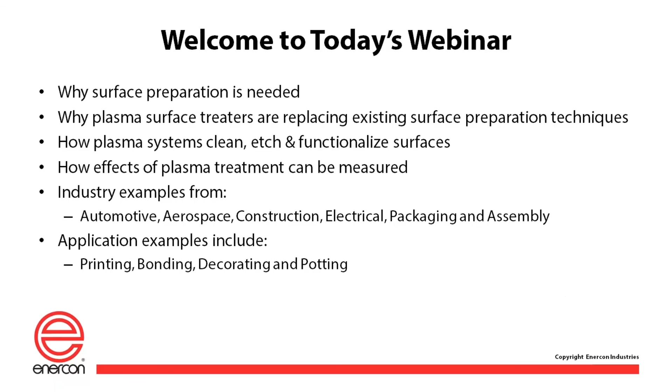Good morning. Thank you all for attending. I appreciate you taking the time out of your day to be here. I'm excited to actually talk to all of you about surface preparation in general. That's kind of where we're going to start. Talk about plasma, of course, being our main topic, but also some of the other alternative technologies available. Hopefully striking a chord with some of you that do work in surface preparation or want to just learn more about the different technologies available.

So I'm going to start by talking a little bit about cohesion and adhesion. When we're talking about trying to get something to adhere better to the surface, you've got two different pieces to look at. When you're looking at the forces of cohesion, this is when you are actually trying to get the molecules that are sitting on the top of the surface. What we're trying to do with the use of a surface preparation technique is to create a better bond of adhesion.

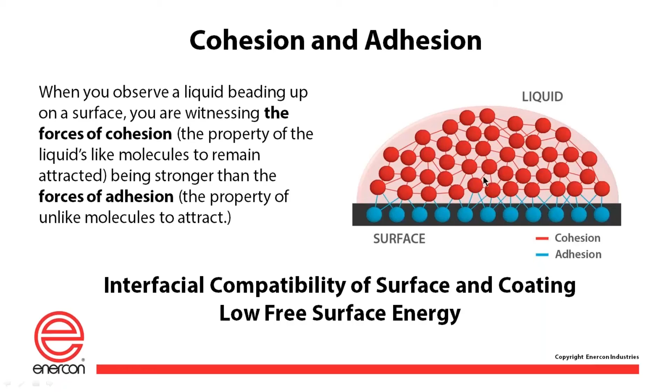That's where we're actually creating a molecular bond between the liquid - keep in mind that liquid could be an adhesive, it could be a coating, it could be a paint - and the surface of the actual material you're working with, whether it be a plastic, metal, or other organic material. I'm going to start to talk a little bit about

the options available to you when you are actually trying to prep a surface for better adhesion. So in order to talk a little bit about interfacial compatibility of surface and coating, there are a couple options when you are working with, let's just say a coating, for example, here.

You would like to possibly get a better adhesion here, but you're looking at maybe modifying the coating itself. So one of the options you could look at is a more aggressive coating, so maybe a solvent-based coating, something that's got more chemicals in it. One of the downsides to that, and this could be with adhesives or inks as well, is that you've got an additional cost. Typically, there's more consumables involved. You've got cleanup, and it's a very hazardous way of doing things. Yes, it works in the end to use a solvent-based coating, but it's just not typically the preferred method of getting good adhesion, especially if you are looking to become more of a green company, or if you are looking at possibly getting away from the use of chemicals as well.

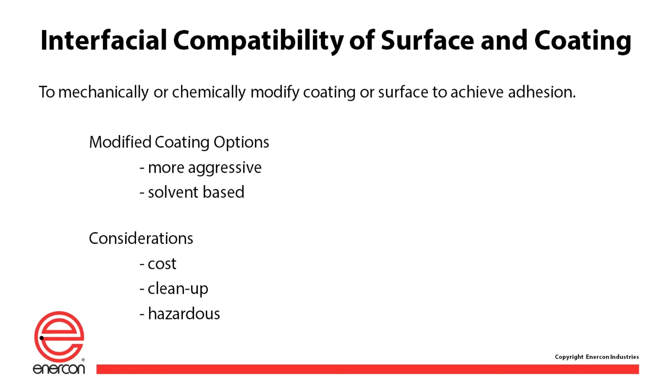So what are your options? Can't change your coating or don't want to, what can we look at? There's basically 5 different categories when we talk about surface preparation. One would be a primer, so this could be something that works in conjunction with your coating or your adhesive. It might be chemically matched to that from the supplier itself, or be something that you use on the side. The downside is it is a consumable.

When we're working with primers, one of the biggest complaints that customers get is human error. You've got someone manually wiping a surface and they look away for a second and go back and look at the part and go, oh no, did I actually wipe that? I can't remember, and then moving on. And so now all of a sudden you've got a lot of opportunity for something to not get properly prepped.

Another option is a chemical etch. We see this a lot with working with Teflon or any kind of fluoropolymers that are very, very low surface energy.

Don't allow customers to bond to it very easily because everything is very hydrophobic. What we do find is that this process is very expensive. There are quite a few companies out there that do this. It's very effective, actually, at treating a surface.

But now you've got an additional expense of taking your product and sending it off to get chemically etched. But it's a permanent etch, and that's one of the benefits chemical etching allows you. Maybe you need to prep 100 pieces and put them in a storage facility - this is a really good fit for it.

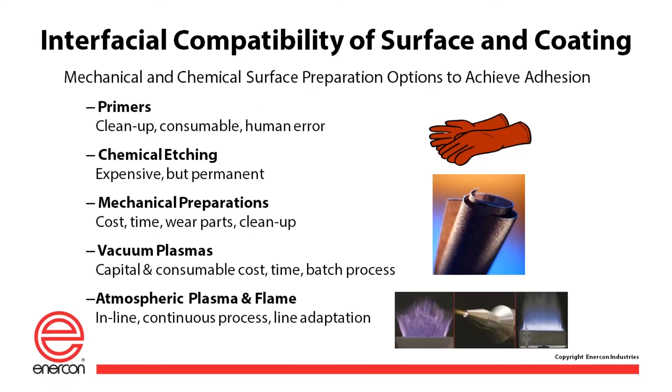It's a continual process. There is an initial investment as well in this versus something such as just using a piece of sandpaper on a part. So you do have a capital cost there, and it's going to be a little bit more limited - if you have a very complex shape, you're going to have to manipulate the head in some way over, let's say, a vacuum plasma. So there are some pros and cons with that particular technology and route as well.

So one of the questions we always ask customers when they first come to us, or even you might be asking yourself right now, is how do I know which of those 5 options are best for me? One of the questions we ask is, do you need something permanent? Are you going to be etching a surface or prepping a surface that needs to hold that etch for a long period of time, or is it just temporary?

Are you planning on applying the coating, adhesive, or paint in line with the surface preparation technique? Who's controlling it? Do you want to control it, or is your supplier controlling the surface treatment or surface preparation? Once again, batch versus in line - do you have all the time in the world, or is this a very quick process? And what are you looking for as far as an initial investment?

A piece of sandpaper is very inexpensive. A bottle primer may not be much of an investment. A piece of capital equipment might be obviously much higher. Do you have the capital to invest in this right away, or is this something that you need to ramp up towards?

And all of that being said, once you have an opportunity to evaluate what your needs are, then it's good to take the next step. And if that next step happens to be atmospheric plasma, that's where we can come into play and help you.

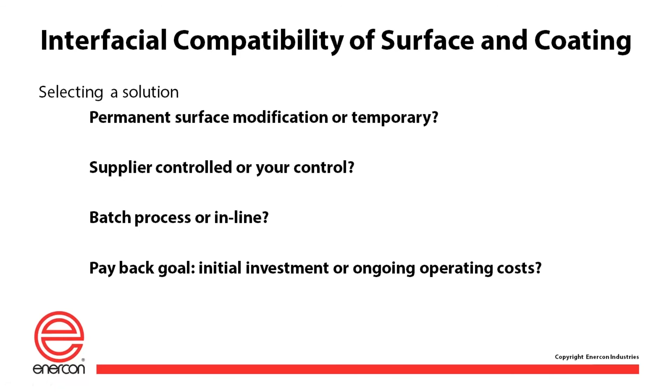Very simply speaking, a plasma is an ionized gas. You can look at this in a variety of different applications, and you've probably seen it in different ways in everyday life. But when we're talking about atmospheric plasma for treating, what we're really doing is ionizing a specific gas. For most atmospheric plasma applications, what we're ionizing is simply air, and the source of that air is typically compressed air. But we may also use a technology like flame technology, where what we're ionizing or burning off is natural gas or a propane flame. You can additionally add a process gas depending on the application. In fact, as we were sitting here prepping today, Sarah and I were just talking about an application where that was specifically the case—they weren't able to achieve the levels they were looking for just using standard air for their ionization method.

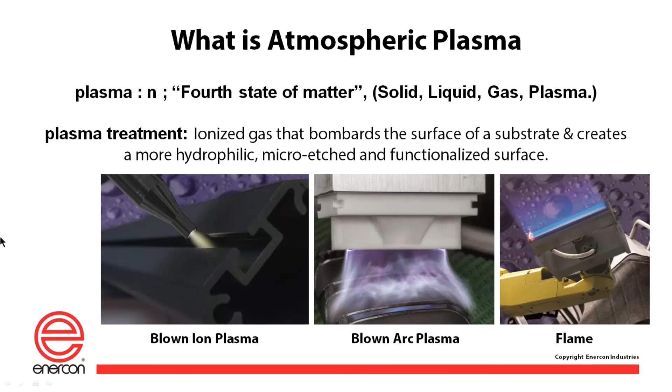So when you plasma treat a surface, what specifically happens? There are three things, and we're going to look at this two different ways. First, let's talk about what's going on at the surface. The first thing we're going to do is remove low molecular weight components from the surface, and we oxidize that remaining surface. Secondly, we're going to cross-link the molecules on the surface of the part you're treating. And in addition, we're going to increase the number of polar groups, which ultimately leads to enhanced adhesion on whatever surface you're talking about.

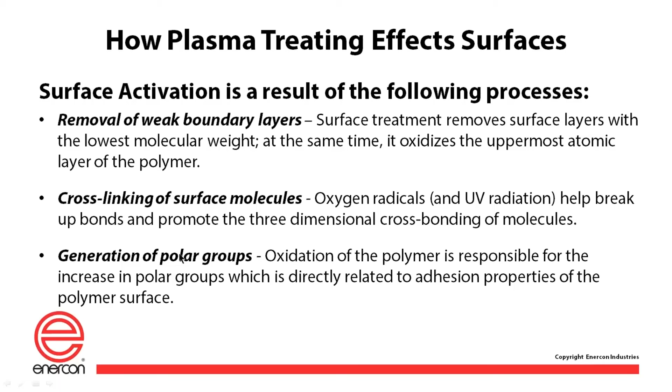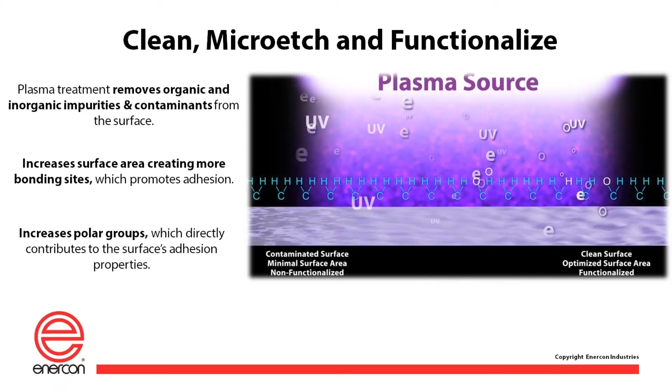You can look at this another way—we often describe it as three things that we do: we clean, etch, and functionalize the surface. When we talk about cleaning, we're removing both organic and inorganic compounds from the surface. This can be a light cleaning if a part is caked in dirt or dust—there are limits to how much you can clean, but oftentimes it will remove a lot of surface contaminants. We're also going to etch the surface. As Sarah talked about with mechanical methods—roughening with sandpaper, sandblasting, or another process—what you're really doing is adding more dimension to the object to increase adhesion. With plasma treatment, we're actually micro-etching, which is a more exact term for what we're doing, and we create more bonding sites to adhere to. Finally, we're going to functionalize the surface, meaning we're increasing the polar groups present on the surface—we'll talk more about that in the next couple of slides.

So anytime you look at a plasma treating process—or really any process—to determine if you're being effective at activating that surface, you've got to look at some measure. With plasma treating, one of the most common methods is measuring the dyne level of a surface. This is a simple, inexpensive test that can be done as you're setting up your line or in a lab. You use a particular solution and wipe it across the object, and with your naked eye look to see whether it wets out or lays down flat on the surface. You do this across various levels, and that will tell you where you have good treatment and where you don't. You're typically going to check the dyne level before you treat the product, and then again after.

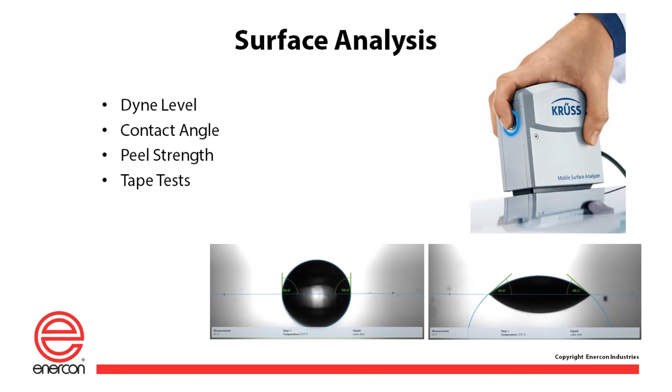You can look at the peel strength—if you're bonding two components together, what does it take to peel those two components apart? In many cases, when we're talking about printing, painting, or coating, you can also look at a tape test to see if your final process is removed after it's been treated and that printing, painting, or coating has been put on it. At the end of the day, you've got to choose which one or combination of these methods is best for your application.

Generally, many plastic materials start out with dyne levels somewhere in the low to mid 30s—pretty consistent across these different materials. When you use treatment methods, you can range anywhere from the 40s up to the 50s, or even up to water wet levels at 72. So there are different levels of treatment based on the materials, and also based on the technologies we'll talk more about coming up.

What's important to know is that you're really aiming to raise the dyne level of the surface 10 dynes higher than that of what you're trying to put on it. So if you're using an adhesive, there's a dyne level or surface energy level related to that adhesive, which you can get from your manufacturer, and we want to go out and exceed that level.

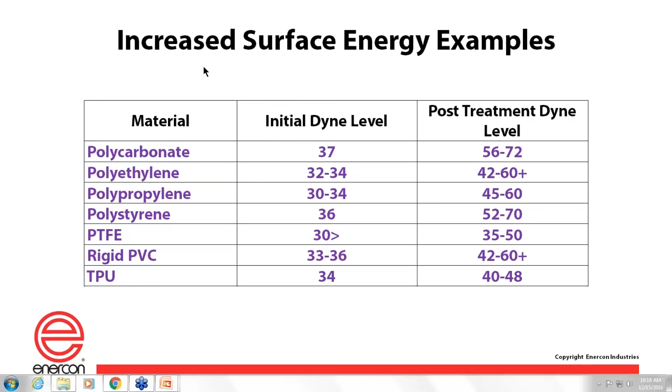Dyne level is a great measurement—it's easy to use, quick to use, and pretty inexpensive, but it's not always the most accurate predictor. We'll have applications come in where we see a significant dyne level change but aren't seeing good results, and then we know we've got to go look at something deeper. Same thing—we have applications where the dyne level doesn't move, but we get great success in bonding to it. So it's a good rule of thumb, a good indication, but not always the exact answer.

So this is where we start to get into polarity as well. We're going to look at the polar and non-polar components of that surface energy measurement. One of the things we're doing is generally increasing both the polar and non-polar components, but you'll see in these slides that we're increasing the polar components usually fairly significantly after treatment.

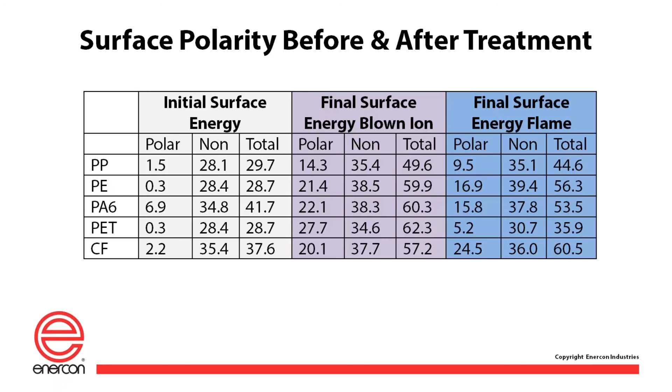What we measured here specifically on these components is final surface energy with both blown ion and flame plasma technology. You'll see that you generally get increases in both, but some materials react more positively to one treatment technology than another. This is pretty unique from Enercon's perspective—we don't tie ourselves to one treatment technology. We actually offer 4 different technologies for plasma treatment, which gives you the best chance, in our lab, to evaluate what technology is right for your application, rather than honing in on one technology which may not be best for you.

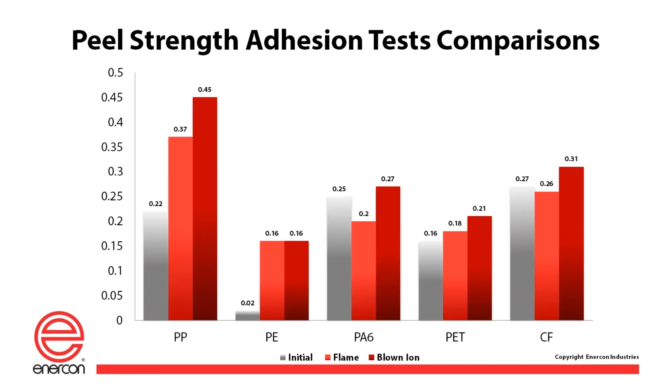We talked about peel strength as well. Here's another set of examples we've done when measuring peel strength, and again, typically what you're going to see is an increase in peel strength across materials. Sometimes you get a better reaction with one material than another, but generally your rule of thumb is that peel strength increases fairly significantly after plasma treatment.

We see a wide array of materials come into our lab and our customers' facilities. Very often we find great success working with applications that include glass. Plastic, by and large, is a home run for plasma treating technologies. Metals can be a very successful application in some cases. We tell folks, bring us everything—bring us everything you're looking at. If it doesn't fit into these categories, this is an area where we have full-time staff employed in our lab.

We offer free sample testing to any prospective customer who wants to try it out and see if it might be right for their application. We can do these tests on our own, evaluating material here, or you're always welcome to come in, observe those trials, and do any additional testing you might think you need as you learn more about the process.

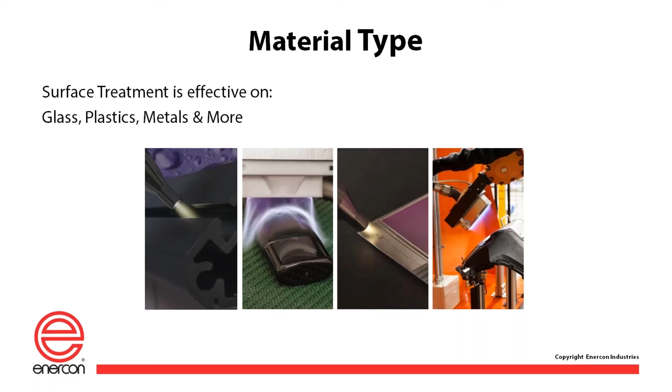If you're considering one of those alternative technologies in conjunction with atmospheric plasma, it's very common for customers to try them at the same time, to set up a DOE comparing, say, sandblasting versus atmospheric plasma, or a primer versus atmospheric plasma. We definitely encourage you to do both at the same time. Sometimes the results are similar and you get to decide which route to go, and sometimes one will be the clear winner.

So who uses surface treating, and what applications tend to work well? The applications and industries we play in are really endless — everything from medical to wire and cable, automotive and aerospace, folding cartons, and the window and door industry uses it as well, along with construction. Because of the versatility of these technologies, we find success increasing bond strength and adhesion with almost anything our customers bring to us.

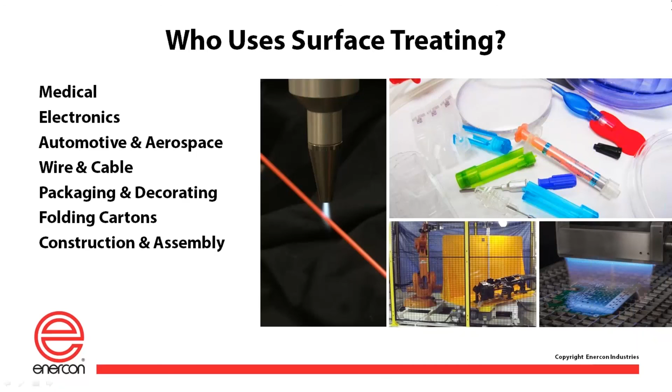So I'm going to turn the reins back over to Sarah. We've got a number of applications that we're going to dive into, which should give you some ideas on things you're working on and how you might use plasma to fit your applications.

Great, thanks Ryan. So I'm going to give you an overlay of a few different customer projects. By no means is this inclusive of everything we can do, but just to give you a couple of ideas. If you have any questions specific to these applications, type them into the question area through the webinar — we can dive into that at the end, or talk with you offline if you'd prefer.

First I'll talk about two different printing applications where customers were able to use atmospheric plasma to increase print adhesion. The first is with a customer called Wago. They work with a nylon 66 part — we do a lot of glass-filled nylon as well — and we find these typically have very low surface energy.

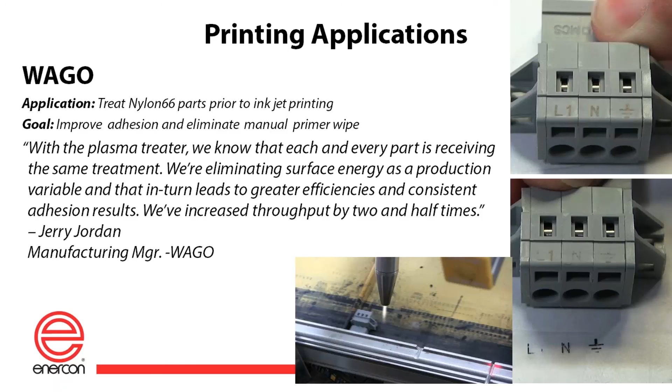On the right-hand side of your screen, before we introduced plasma, you can see on the bottom right a tape test — after the ink was applied and the tape was applied over it, the ink easily came off. At the top of the screen is with plasma. The idea is that this customer could produce the part, print on it with a digital inkjet, and not have any problem with it coming off — getting rid of manual priming using a chemical, and removing the element of human error. So they were pretty successful, and we were successful in helping them as well.

Another printing application I'd like to point out, a huge part of what we do, is digitally printing on wire and cable extruded jackets. This customer, Nexans, is a very large player in the wire and cable market. On the right-hand side you can see a photo of a plasma head immediately before a digital inkjet head. They need plasma because more companies are moving to dynamic date coding and variable data coding on wire — they want to change that frequently and need to get away from contact wheel printing and other physical printing on the surface.

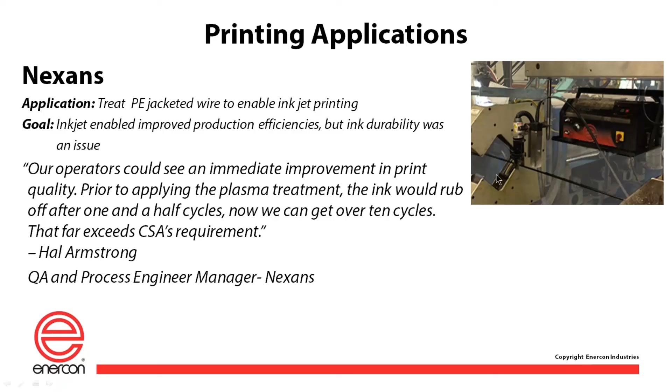The downside is that a lot of these inks don't adhere well to the jacket, and those jackets pass through a water bath during manufacturing that can sometimes be contaminated. By using plasma, this customer was able to get better adhesion of the ink, so it could handle being installed in the field without rubbing off in the installer's hand or whoever's working with the wire on the back end.

I'm going to talk about bonding as well. We talked about ink, but now adhesives. Another application is using plasma on a glue flap prior to putting adhesive down, to get a better bite and better bond into the coating on the outside of a folding carton. For those unfamiliar, folding cartons could be anything from a toothpaste box to a cereal box to a food product or anything you find in the store. Obviously if that glue flap comes undone, that's a huge problem for the customer.

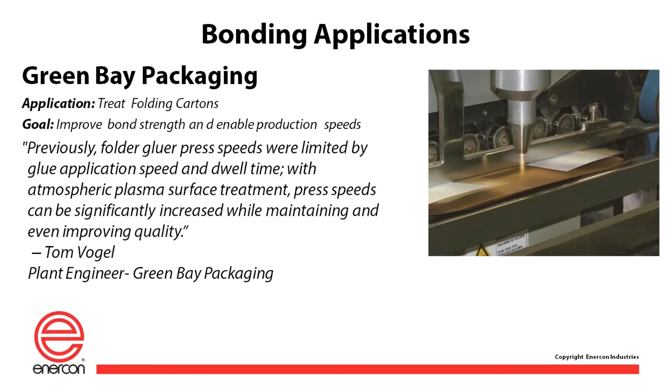So some customers choose to use plasma as an insurance policy to ensure that glue flap doesn't come undone. The plasma is used right in line with the adhesive being laid down on the surface, allowing them to keep production speeds up, perhaps get away from hot melt, which can be very expensive, and go to a cold adhesive — saving time and money in doing so.

Another bonding application I'd like to point out, and Ryan mentioned this earlier, we do work with a lot of automotive customers, was with Eissmann Automotive. If you want to play around on our website at enerconind.com, we have a lot of YouTube video links there, and there's a couple photos of these treaters running and actually treating the part in action. What they're doing here is treating various automotive components - polypropylene, ABS, different types of glass-filled plastics. If you sit in your car and look around, there's a lot of plastic components that go into automotive. But in order to get something to adhere well to it and handle the different hot and cold temperatures and vibration and all the other things that go into automotive manufacturing, you need to make sure that bond stays not only adhered but permanent.

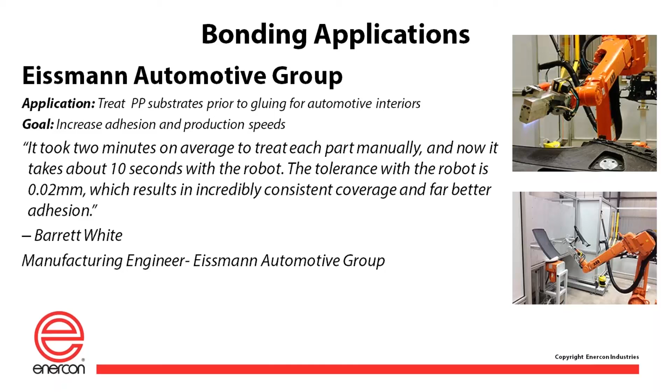It's really a great alternative to priming. Priming is used a lot in automotive, but as we're all trying to get leaner in our manufacturing and more efficient, using atmospheric surface treatment allows customers to do that. You'll see these heads are actually on a robot, and if you're curious what kind of plasma is being used here, this is our flame plasma that they're using because of the complex shape and size of the parts.

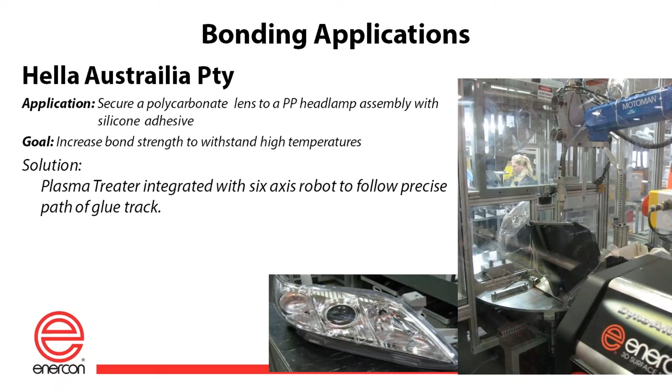Another bonding application, kind of a fun one to point out for those who may not know - your headlamp on your car, if you've ever seen moisture inside of it, typically older cars, that's where a little bit of water and moisture gets inside the headlamp. The reason why that happens is because the bond, the sealant to the actual lens itself, is actually coming undone. So in recent years, Enercon's really been a key partner with a lot of headlamp assembly companies, specifically Hella, who has partnered with us to actually use plasma to treat that glue path prior to putting the adhesive down, allowing that bond to bite into the plastic more, become stronger and more permanent, and be able to withstand high and low temperatures, since we're sitting here in Wisconsin today.

A couple other things I want to point out are some assembly applications. We do work in the window and door manufacturing environment, and a lot of these customers need to either wrap perhaps a vinyl around an extruded door for that wood-like look, or a paint around it, or perhaps they even need to pot or lay down a sealant glue path in order to get a better bond between the glass and the actual frame of a window or door.

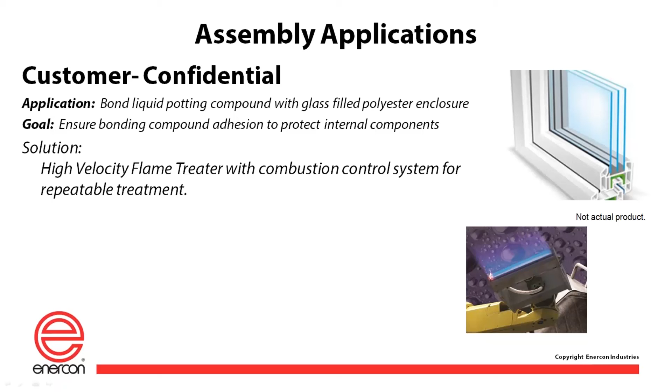One of the solutions to this is to use a flame treater, pictured at the bottom right hand of your screen, in order to get into a lot of complex areas and shapes. This has really been a revolutionary technology for window and door construction assembly, because it allows them to get completely away from primers. As you know, a window or door's bond needs to be permanent, not just for the few years you might own a car, but perhaps the 20 or 30-year warranty that the customer has been promised. So by increasing their bond strength, they've been able to fulfill that promise to the customer, and also get rid of the human element and the chemical element in their actual manufacturing.

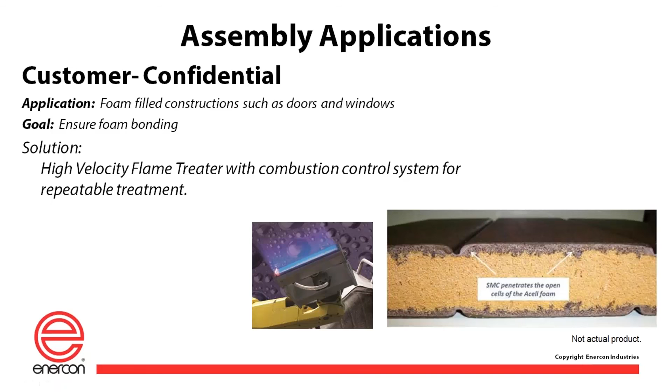Another application goes right alongside the door, but this could also apply to other types of plastics where foam is applied, where we need to treat as a filler. As you know, many doors aren't just made of wood anymore - there's typically some sort of insulation between the door panels, and another reason why someone would want to use flame or plasma in general is to get a better bond strength of foam to that plastic. It could also be a composite material. So instead of this being just a straight adhesive, foam is also another application we work with on a regular basis. This could be any case where we need foam for insulation, so it's not just related to windows and doors - it could be for consumer goods or refrigeration or things like that as well. But really working with a lot of different plastics and allowing customers to keep their process moving is really the key to their success.

The last application I want to point out that we get involved with is potting in electronics. Potting applications are often very tricky. We have different electrical components and plastic components, and one of the main questions my customers ask is: am I going to damage anything by using plasma? Or maybe I don't have a way to get a primer in there and I'm really stuck. What can I do?

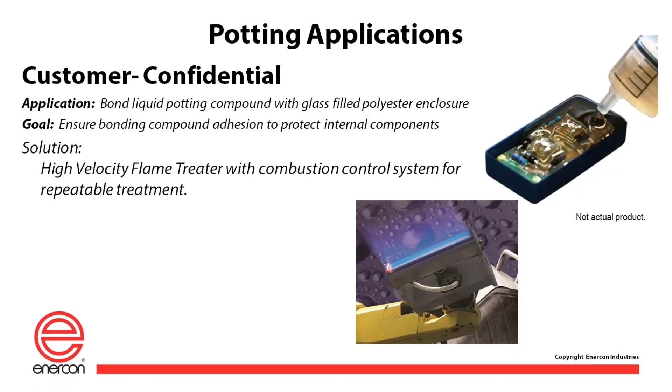One of the really neat things is there are two technologies Enercon offers that don't interact negatively with any metal, conductive, or electrical components: blown ion and flame plasma, pictured here. It allows you to get into very tight crevices, pre-treat, clean, and micro-etch, as Ryan went through earlier, and allow you to put that epoxy or potting compound into a cavity. Whether it's a very small electrical component or a large one, both have the ability to do that. That opens up more opportunity because, going back to that original list of options, typically sandblasting isn't an option and priming isn't an option, so you're more limited when working with electrical components in potting.

So plasma is definitely something you can look into if this is something you work with.

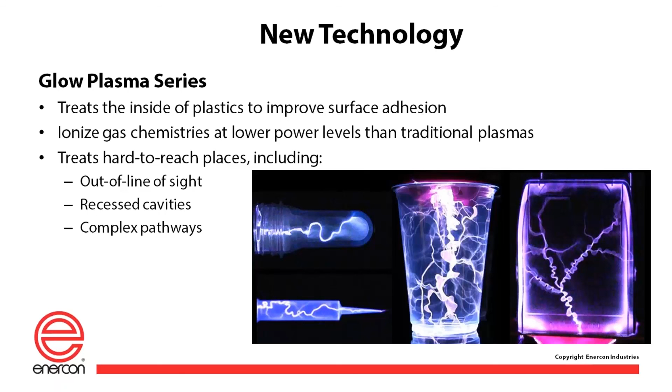And I'm not going to lie, the pictures are pretty cool looking too. So if you have an application you'd like to try this technology out on, please feel free to reach out to Ryan or myself at Enercon, and we'd be happy to run some trials with you. We're very excited about this technology. It's going to allow customers to treat in line, keep their process moving, and maybe get to those areas that weren't traditionally reachable with other surface treatment methods.